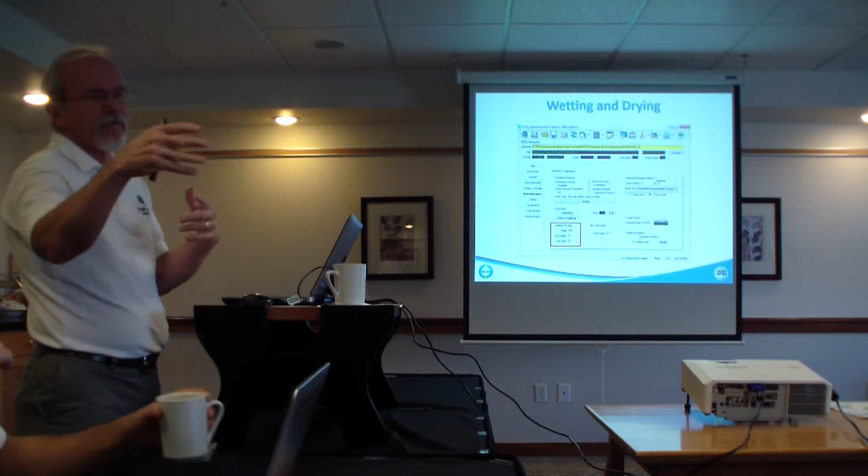First off, just kind of some big picture, some things that are needed for a lot of different models, but kind of where do you get it? So you control wetting and drying, as many of you know, here with this flag. We're going to basically simplify this. We need to be simplifying it for a while. There's no need to have a minus 99 and a bunch of other options here, because it basically all boils down to turn wetting and drying on, turn wetting and drying off, other than the dry depth number, which I do think still needs to be there. That's it. But right now there are several options that are available. When you put your mouse over it, it gives you a description of what some of these options are.

Now, it also depends upon if you're 2-time level or 3-time level. 3-time level, you only have one option that really works. If it's any value other than 0 there, the 3-time level solution will apply the same wetting and drying algorithm. Now, the negative in the wetting and drying term has, in traditional and legacy applications, dealt with what they call the cell skip, where it computationally eliminated cells that met the cell dry criteria. But if you didn't have a negative, it didn't skip. Well, with EE8, that's no longer true. Basically, EE8 has thrown out that general approach and has taken a more robust, complete view of wetting and drying. If a cell is computationally dry, it's always skipped, no matter what, in all the routines.

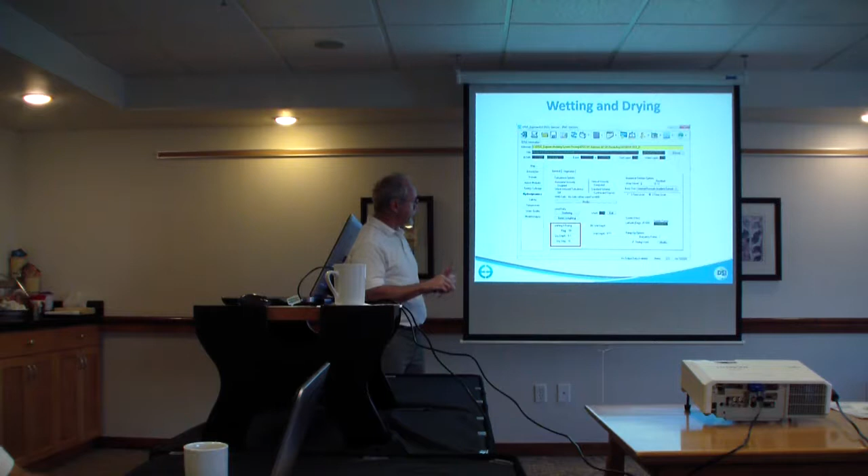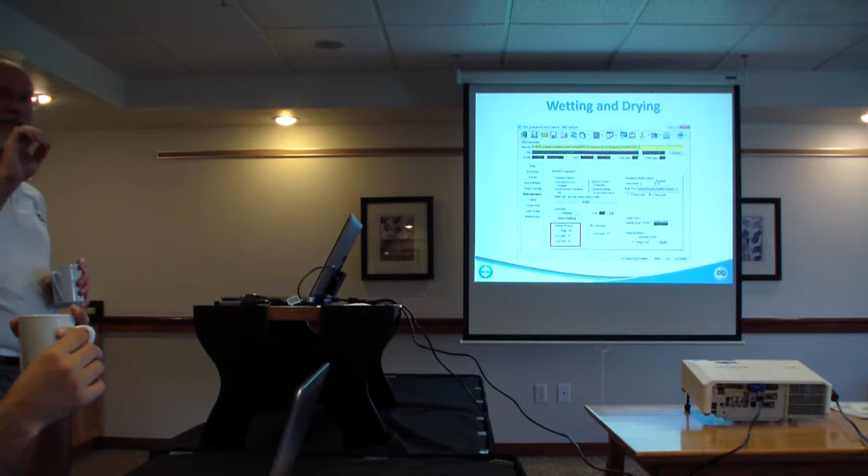I make the assumption at the end of this step, if it's still isolated, that all the water in that cell has disappeared, either through evaporation or infiltration or something. So really that's the question. So, wet and dry, yes or no? If you turn it on, what's the dry depth? And then finally, do you want to waste water from isolated cells? And that's really the extent. Yeah, Mike. Now, if you have a very large area that is isolated, but you don't want the water to be... Right, but it has to be a single cell. All four faces of that particular cell have to be isolated. If you've got just two cells connected, they'll never go dry because it won't apply.

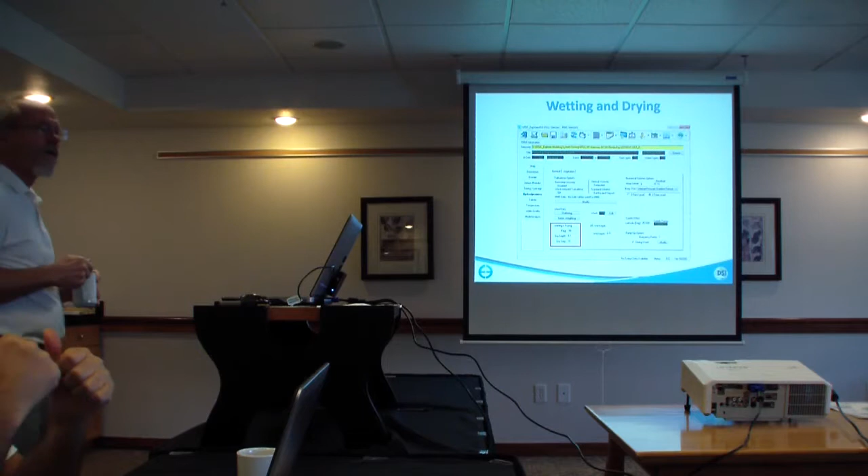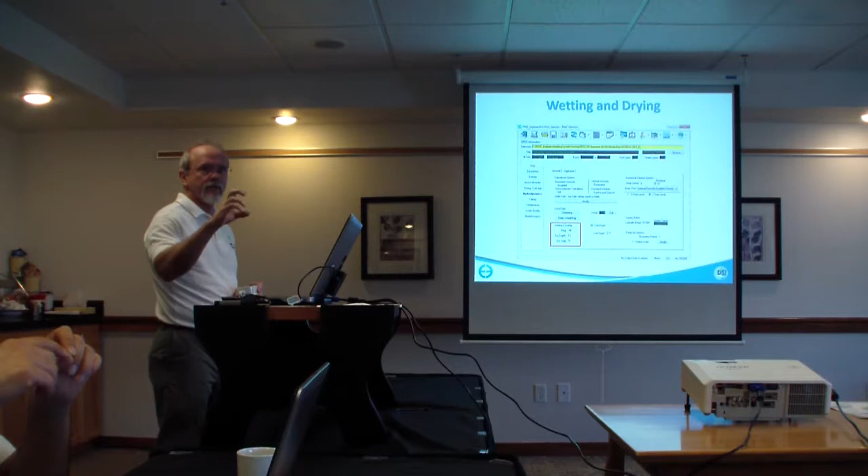Could you go over the idea of wasting? Wasting's just going to get rid of all the mass that's in the cell. Well, the water essentially disappears. It's actually, from a mass balance perspective, it goes into a QD waste bin. So later, if you're trying to do mass balance, now EE doesn't store that. That's all internal to EFDC.

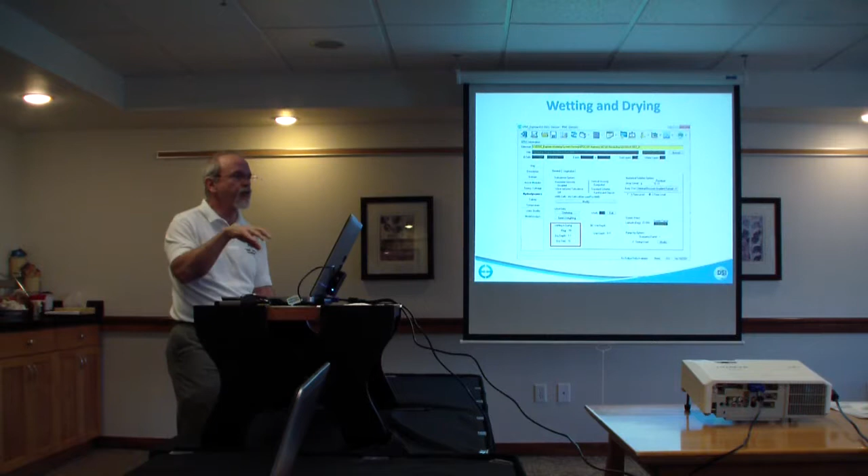So we were talking about this a little bit, about conducting mass balances in EFDC versus in EE. Well, EE is limited in its mass balance feature. It does some crude, kind of high-level mass balance, but because of all the processes and the time step at which those processes are occurring, really, if you need to do mass balance, you need to do it inside of EFDC. We haven't really covered that, but it's probably worth mentioning.

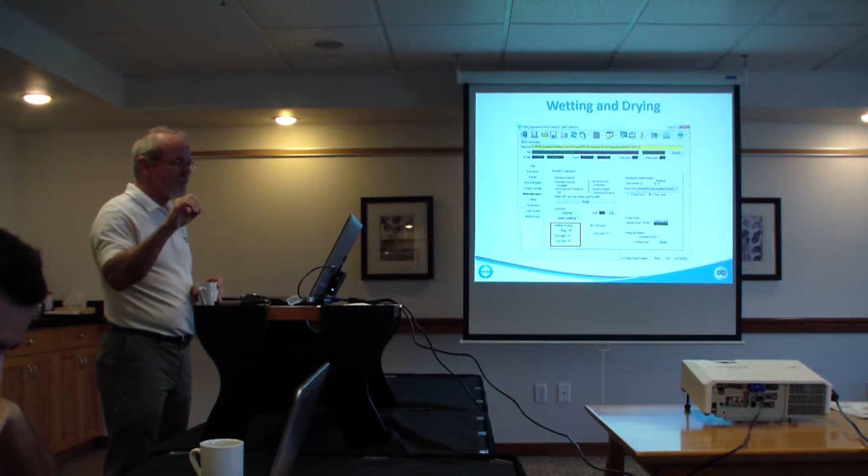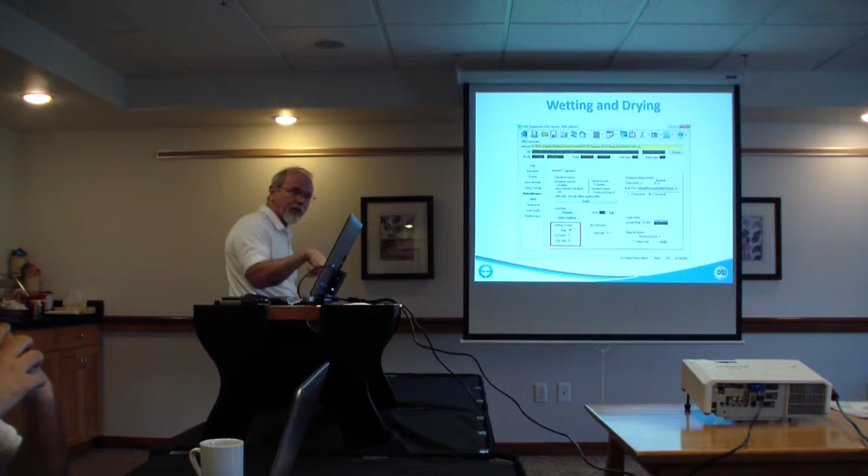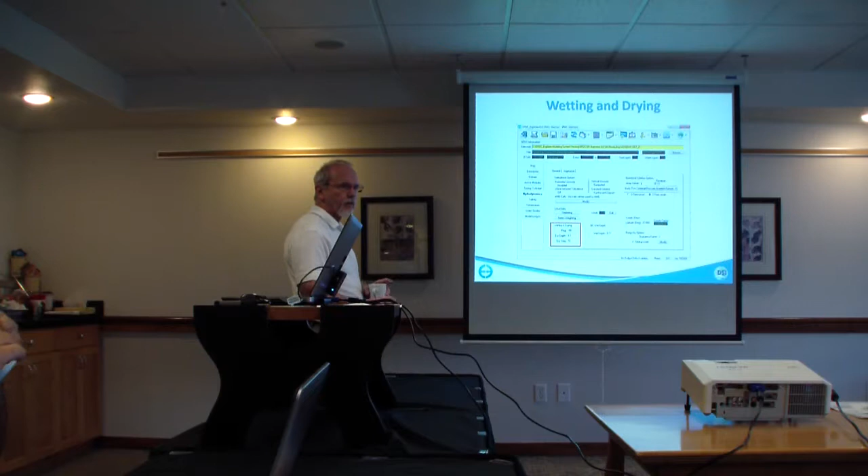Getting back to what happens to that mass, that water just disappears. Any concentrations that were in that water, gone. Now, if it's solids, and the solids have settled to the bottom, they're in the sediment bed, not in the water column, they're maintained. Nothing happens to that mass. But anything in the water column that is quote-unquote wasted, the water volume is wasted and the constituents in there are wasted. Wasted in the sense that they disappear.

And that's when that dry step has a negative value. The reason why it doesn't really make any sense, it doesn't really apply anymore, is because the idea was that after this number of time steps, it would treat it as dry. But we don't ever do that anymore. So it's always, well, no, it's not always wasted. It has to be negative right now for it to be wasted, but essentially it ignores it right now in EE8. So there's some legacy stuff that has to be cleaned up to move forward into a more streamlined, robust approach.

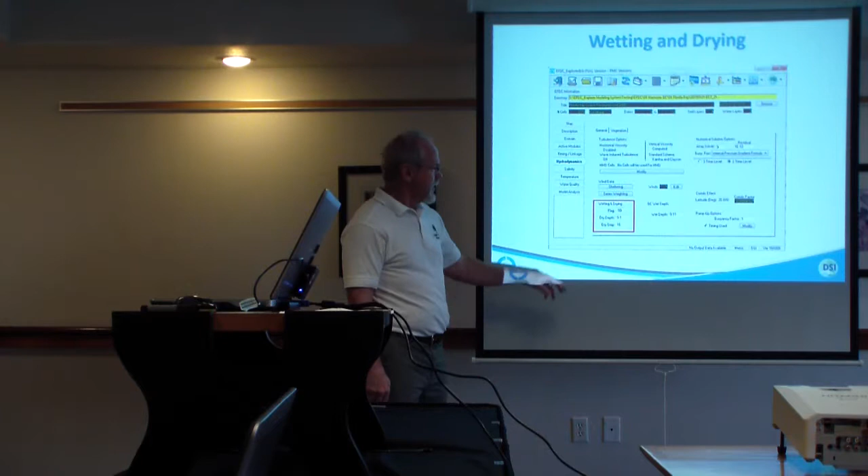What happens, let's say in this case, after 16 steps? After 16 steps, actually, all it does is reset the counter and start counting again. That's all it really does. So in this case, for EE8, it's going to do absolutely nothing. But if it's a negative, then it does get used.

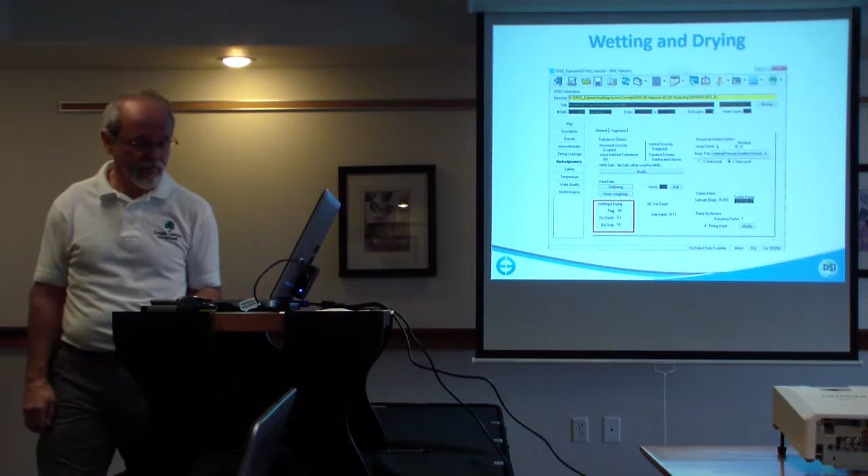Coriolis had some complaints from various people about the way EFDC computes Coriolis. There's not a Coriolis factor in the X and a Coriolis factor in the Y. There's a single Coriolis factor that's applied equally to both X and Y. And the only thing that affects its overall rotational effect is model grid size and size of the domain. And shoreline, bathymetry, all those things affect it. But this is a single parameter, basically calculated from your latitude. Is that the middle of the...? Yeah, middle of the model domain. It's a simplistic approach, but that's how it's computed.

And in EE, by default, it's using the latitude at the model domain centroid, but you can provide your own value. Just type it in there, and it'll calculate what the Coriolis factor is, and that's what goes into the input files.

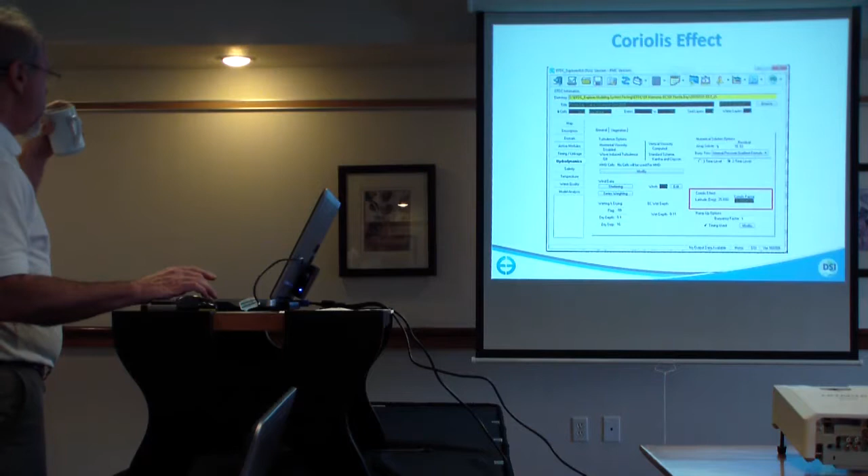Well, I didn't really talk about this, but it's probably worth a brief mention. Ramp-up options, because coastal systems can be notoriously unstable when you're starting up the model, if you've got these open boundaries and they're deep and different things. The standard option for a full model run with no special conditions would be timing is not used and the buoyancy factor is 1. Essentially, this buoyancy factor is kind of a legacy testing tool left over.

I can have salinity turned on, temperature turned on, and set my buoyancy factor to 0, and density will have no effect on the model. I can optionally put in a buoyancy factor of 0.5, and density only has half of the effect it would normally have. But it doesn't really make any sense. It's a testing tool, and I use it when doing diagnostic work. I'll set the buoyancy factor to 0 just to look at impacts without density. But it should be 1 pretty much all the time. You've got to have a strong reason for it not to be 1.

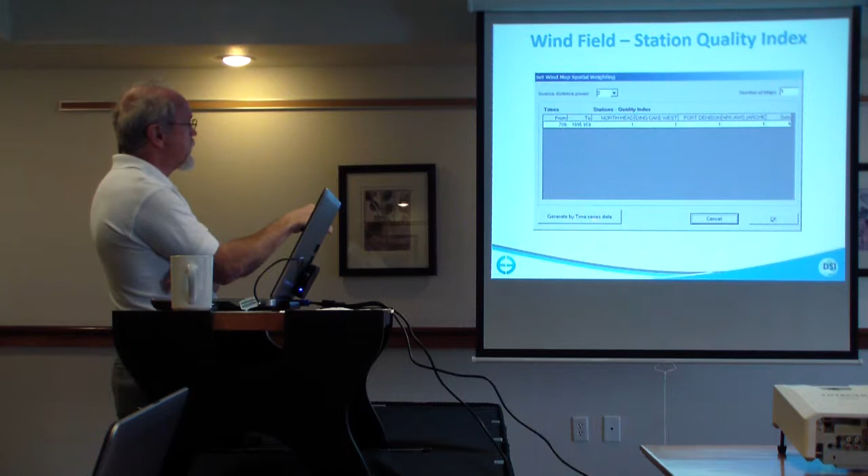They all have data that cover the model runtime. So there's one map shown here. However, if for whatever reason North Head only had data for half of my data collection period, but I wanted to keep it in because I felt like it added value to the modeling process, if I click this button here, Generate by Time Series, it'll go out and look at your period of record that you have for each of these different stations, and build a set of maps based on where data is actually available and where it's not.

And if, let's say, the first half of the simulation period North Head was available, but the second half it wasn't, this would show up as going from like 700 to let's say 900, and these would all be 1, 1, 1, 1. These are a quality index. I can put more weighting on one station than I do on another if I want. This doesn't have to be 1. This could be 0.5 and 2 and 4 and then 1 again. Doesn't matter. It's just a relative weighting of each station.

But then the second line would be 900 to essentially 1100. This quality index would be 0. So essentially, there's no data, so you can't really use it. So the quality index would be 0. And then we'd have 1, 1, 1. So from day 900 and on, you'd have a different weighting across the entire model domain based on this available data and the quality index.

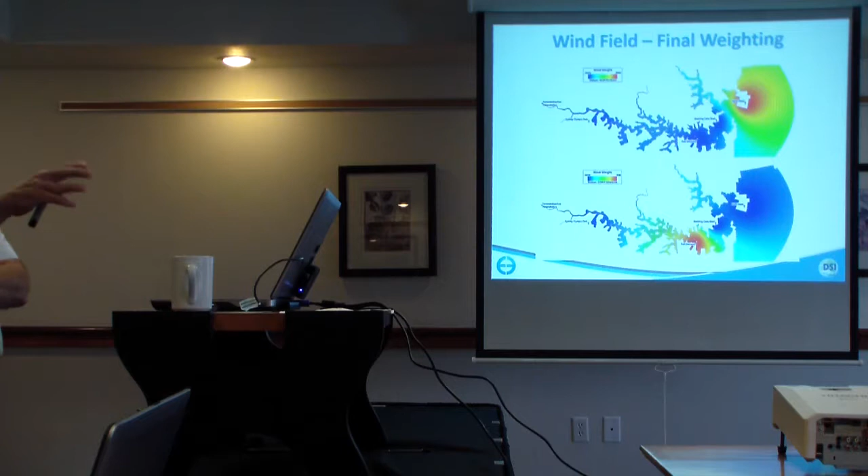Some of you guys have seen it. I forgot who was all here. Only Mike was here. We should stop and just show him.

Yeah, it's using the 3D fly-through tool in EE. We have a fly-through of Sydney Harbor. But anyway, so you can see the weighting. And we're using an inverse distance weighting of 2. You can make it 1, 1.5, 3, whatever you want. Actually, I don't know if it's a drop down. It's basically in half unit increments, but still, that's more than adequate for picking what you typically want.

But you can see the effect. So Fort Denison is here, and all the cells around here essentially have a weighting of nearly 1. It's really hard to read up there. Maximum of 0.998. Yeah, it should be close to 1 right near the monitoring station, and you can see the influence. So Fort Denison has an influence up here in this arm, but down here it's around 20% or so. North Head's about 20%. If I looked at Fort Denison, it'd be about 15%. By the time you get that distance out, all the stations are having an influence on it.

So that's kind of the effect of these winds on the wind weight, and that's ultimately what gets used. And exactly the same process works with the ASER files. So if you have ASER weight, it's the same process that you would go through and apply these relative fractions. So any number of stations, and any mix of data, it's a pretty robust way of calculating all this stuff.

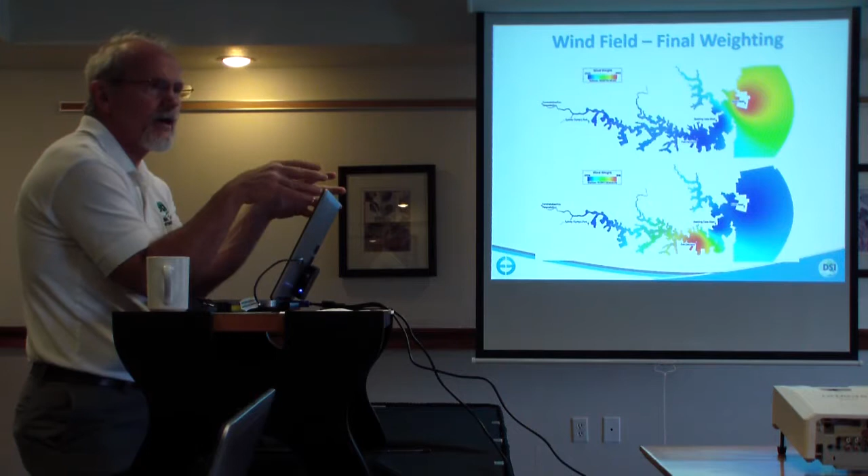No, my personal feeling about wind is that if you can get wind data to the model on a 15-minute or less basis, you're better off than hourly winds. It also depends upon how your data is collected. If it's an NCDC or National Weather Service collected data set with all the modern telemetry, it's an average value for the hour, and that's okay. But I prefer driving it with shorter term data and letting the model respond to those shorter term perturbations.

But yeah, it's frequently just all over the place. Not random, but nearly random. And certainly at low wind, it is random — it's just eddies floating around in the atmosphere.

Yeah, you could smooth it, but I wouldn't necessarily. Just make sure, unless it's instantaneous — if you've got some site-specific data collection and it's an instantaneous wind, unless it's pretty frequent, it's almost useless. It has to be averaged, some high frequency data collected and then averaged into some reasonable time step.

So if you're on 6 minutes, would that be a 6 minute average or 6 minute instantaneous? 6 minute average.

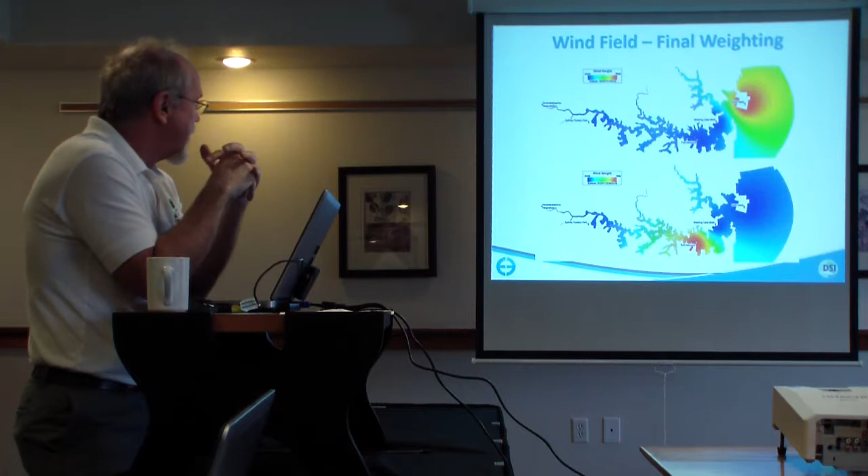That puts a lot of data in, but computationally it doesn't make any impact on the runtime. Files are bigger, but it's a pretty minor issue.

Okay. Let me think here.

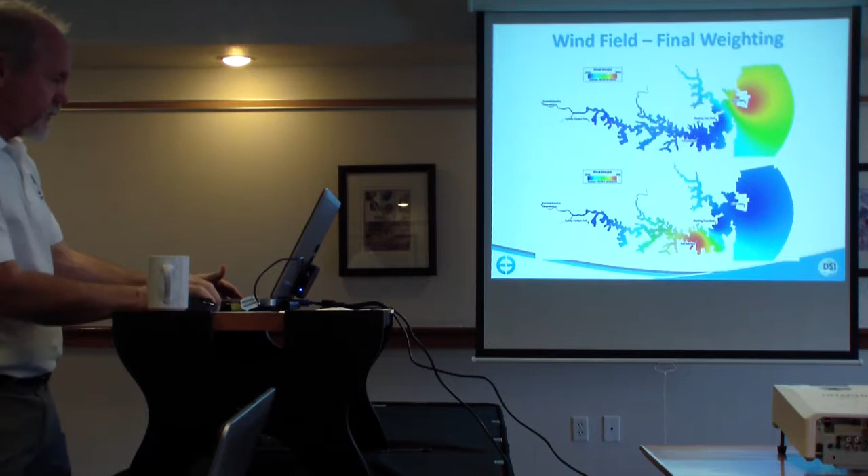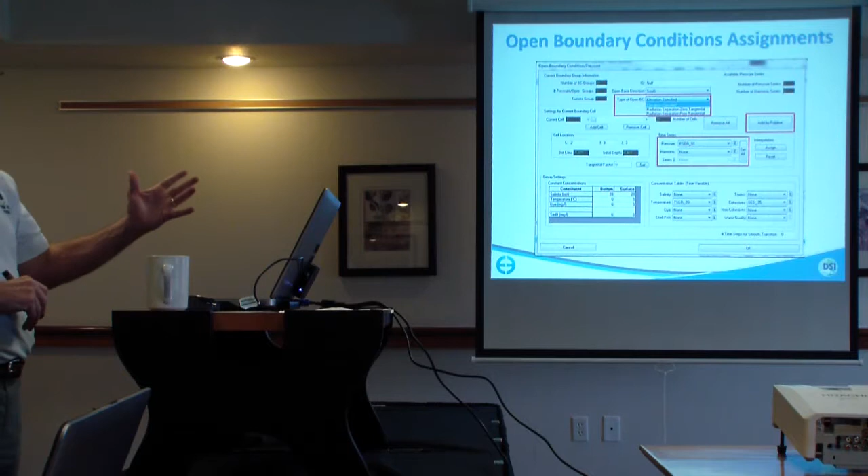In EFDC, if you look at the actual input file, you can do it on a cell-by-cell basis. But to me, that makes no physical sense. How many people have concentration data on every separate cell along an open ocean boundary? You're lucky to have some data offshore, let alone every cell. So we think this makes more sense, it makes it a lot easier to manage, so we just group all these parameters down here for the entire group.

So here is the specified constant concentrations, and you'll notice here we've got some combinations. We have salinity and bottom elevation. At the bottom of the model, it's 33, at the surface it's 28, and EFDC will linearly interpolate between those. In this particular case, I have no salinity time series, but when it's calculating an incoming concentration of salinity, it'll take the appropriate depth concentration of salinity from these numbers, plus whatever would have been in the salinity time series.

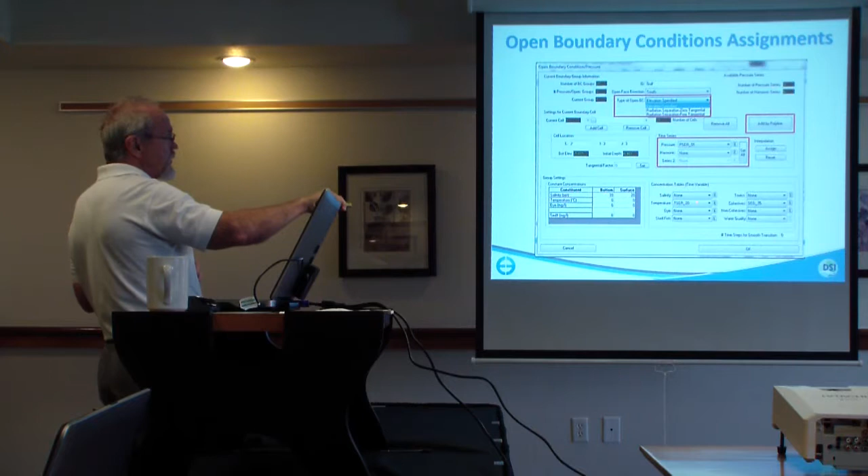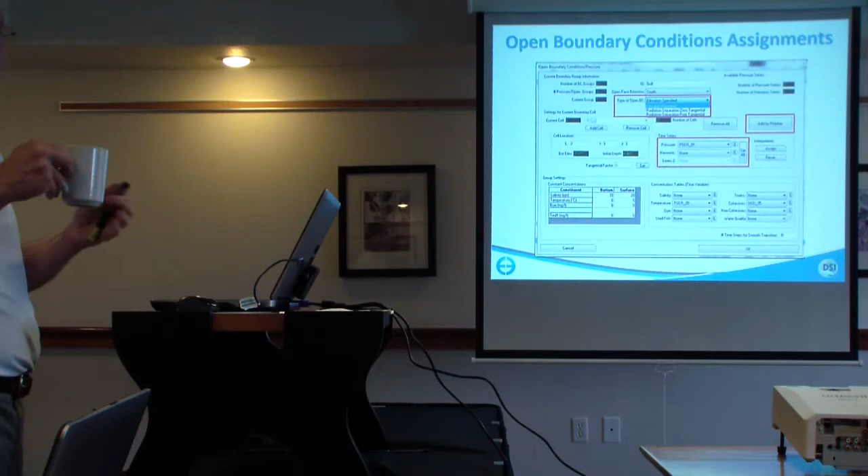Conversely, temperature, we're using a zero here, but we're specifying a time series. So these are either or, but they can be both, you could actually use both. Can you specify a layer? Yeah, oh yeah. Well, you can't with the constant, but the time series associated with the concentrations are all by layer, because you specify for each layer. So you have to specify them by layer. Now they could be uniform if you want, but you have to have a value for every layer.

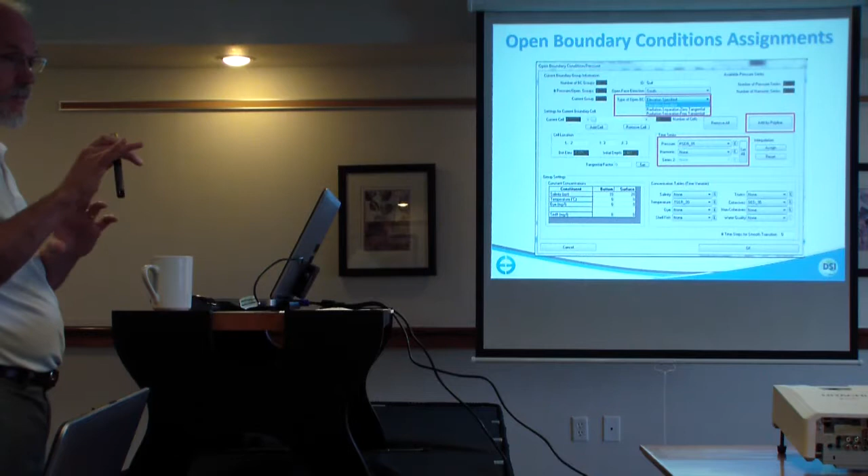Number of time steps for smooth transition - it's useful for that not to be zero. This just kind of deals with the concentration transition from inflow to outflow, to kind of prevent a little bit of instability at the boundary. But if you don't really have instability at the boundary, it's not going to do anything. It's just saying how many time steps it's going to enforce before it allows the concentration profiles to turn around. I typically put a number like 20 in there, just in case there's some little bit of oscillation near the boundary.

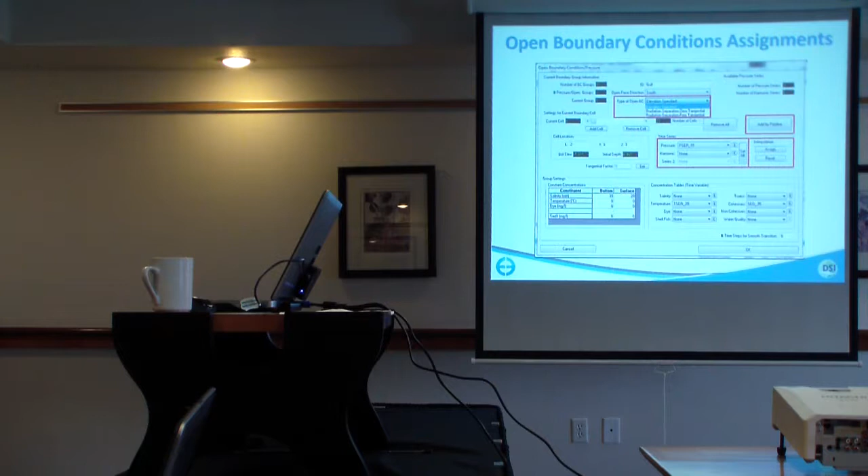Now, because each cell can have a unique series - and this is what I want to play with here, I don't know if we'll get to it before lunch - you can, if you had a unique harmonic signal for each cell, put that in there so a particular cell would have a particular harmonic, or you had a measured series extracted from some large-scale ocean model, and you're extracting time series for your pressure. You can do these all manually and have a separate series associated with each and every cell. However, a lot of times that's a luxury you don't have.

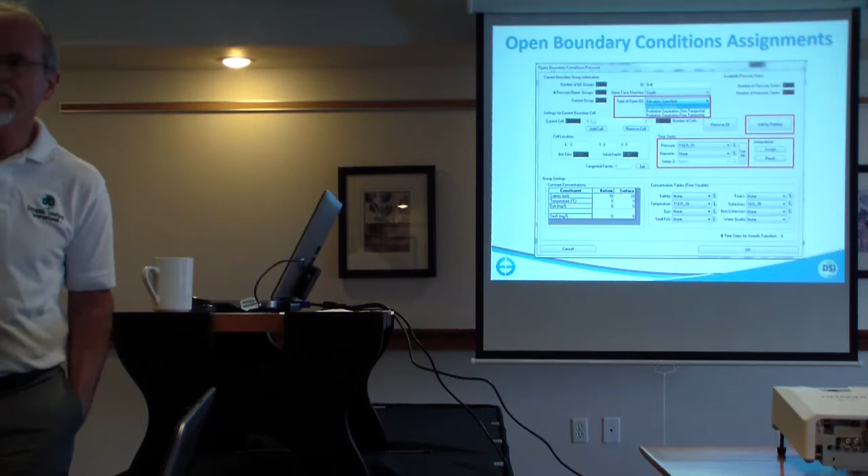So what you do have is a known series at one end of my model domain, and another known series at the other end of my model domain. And now I want to build essentially an interpolated series between known time series at either end of my domain. EE has the ability to build those time series up for you - it interpolates both spatially and temporally to build these time series. You can reset them and do it again easily, if you change one end or the other of your series, or you're doing sensitivity and moving one, you have to reset it and then reapply the interpolation process. We'll play around with that here today.

Let's talk about the constant concentrations.

So let's reiterate some of the user interface side. This is where you make your major selection with respect to setting the radiation type or specified elevation type.

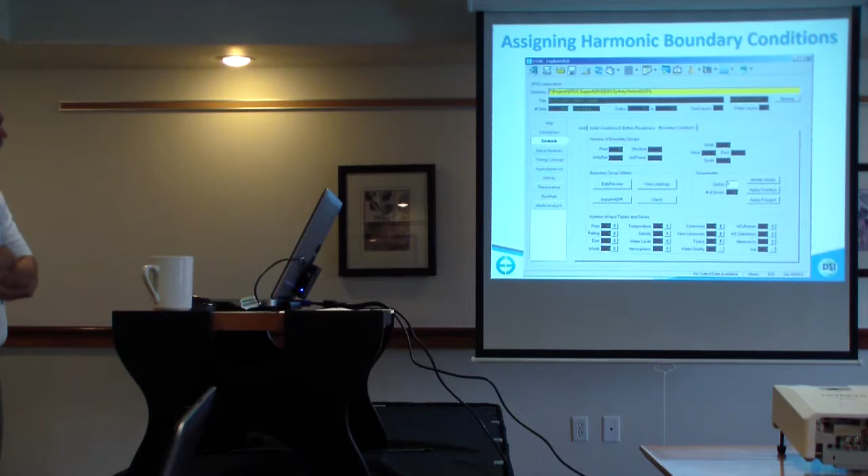Now let's talk about assigning some of these time series. Let's start with the Harmonic Series. In EFDC there's an option for specifying harmonic coefficients, and for each station you define amplitude and phase, and it will internally compute the boundary forcing at that cell. That's referred to as the harmonic boundary condition, and you can access that directly from the domain tab boundary conditions.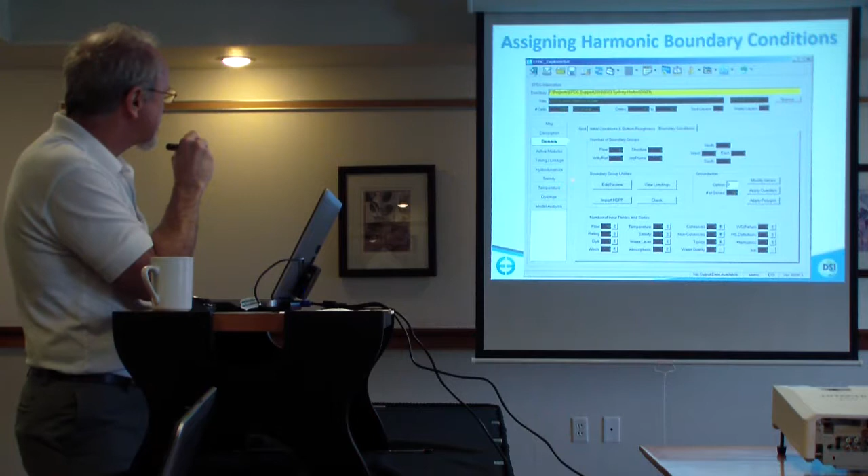All your time series and forcings for your various boundary conditions are available down here in this frame. Or you can access them under hydrodynamics, which has a wind tab where I can edit my wind, or I can just go to this tab and click down here. Likewise for temperature, I have a time series access here, but I can also access it there. It's just a quick way to get access to all the information.

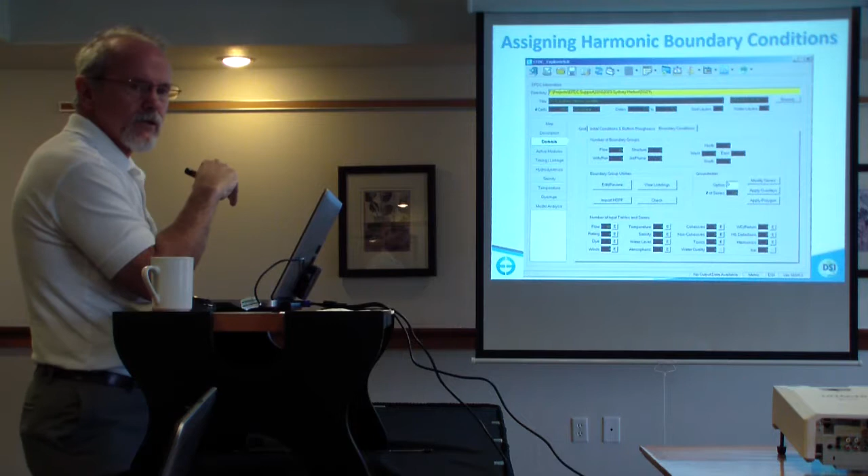So the Harmonics tab is available when you're editing an open boundary condition, but here we can go directly to it. When you click on that button, it brings up a form that uses the EFDC computed harmonics approach.

This is the equation EFDC is solving when it's calculating your resulting tide level. It represents the number of constituents you're actually simulating. In this case, I'm only simulating 5 of the principal components of that tide series, picking up some of the most significant amplitude constituents.

I've got 5 constituents shown, so N would be 5. So it's calculating, and H is the amplitude, this is the speed of the tide harmonic, and this is the phase.

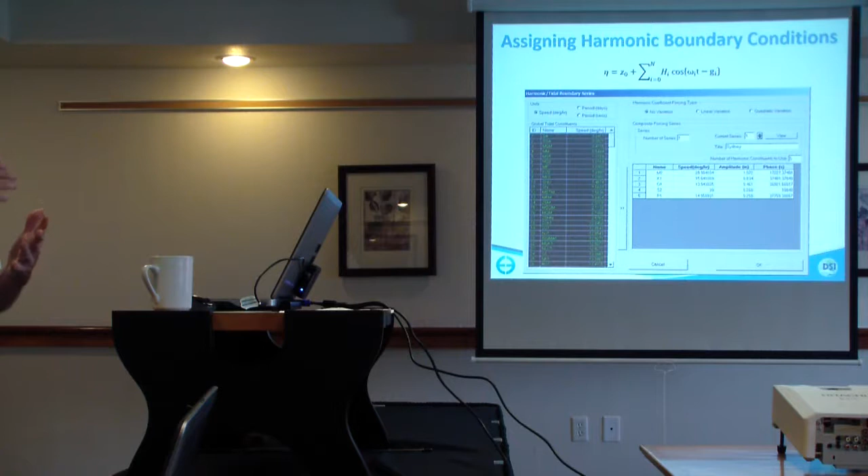Now, oddly, and I'm not sure why it was done this way originally, all the tidal constituent parameters are defined in seconds, which is a bit of an odd way to refer to these constituents. Because if you remember looking at the NOAA website, everything was in degrees per hour or degrees, and that's true just about any place in the world where you look up these tidal constituents - their units will be in degrees or radians, or radians per unit time for the period or the speed.

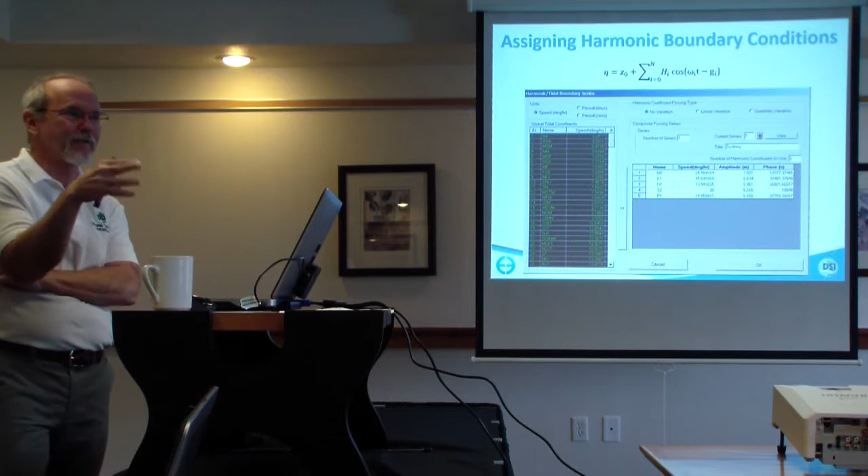So you have to convert - and EFDC even should do this, but it doesn't. You have to convert the corresponding phase that you look up on the NOAA site over to seconds. It's an easy conversion, we have it on our website, we tell you what to do. Basically, you take the phase and divide it by the speed and convert it to seconds. But you have to manually do that from the website. This probably should change and have degrees here, allowing the user to directly input it, but that's a different issue. Anyway, this works.

But importantly, remember that the G essentially adjusts your phase based on your time zone. So it knows your station position, and your phase will vary based on what time zone you selected when you asked for your harmonic coefficients. This is a simplified equation approach for your tidal harmonics, and it works - that's what's in EFDC.

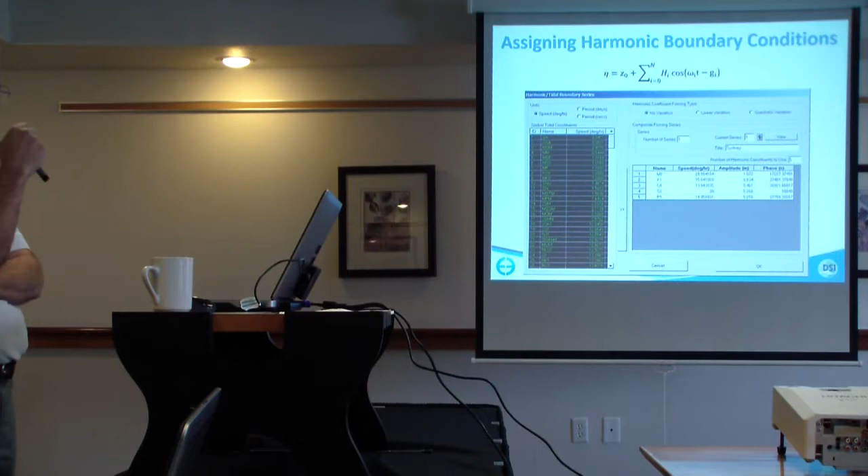But if you try to go through a really robust process of duplicating a predicted tide series from NOAA or some other system, you're not going to match up exactly. It's going to be off because it's missing some terms. We've got these terms in another tool, but we'll talk about that in a minute.

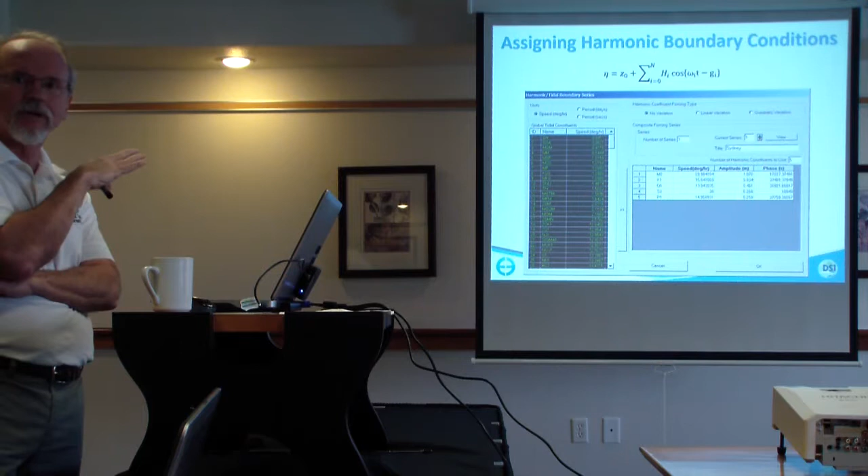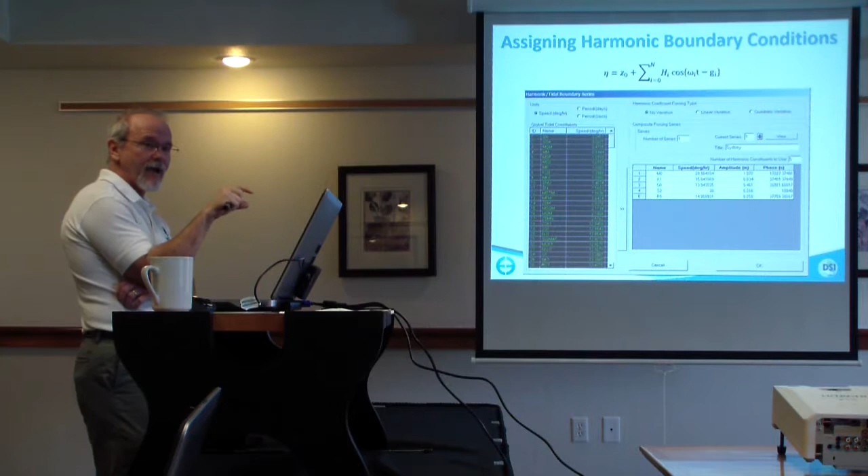Let's talk about this form here for a second. As I was mentioning, there are some other forcing types using harmonics where you can vary temporally and between the harmonics. I have the equations and I see them in the code, I know what it's doing, but I haven't ever seen the theory or a description as to exactly why these are there. If anybody has any documentation on this, I'd love to get it.

But typically we select no variation, and these are then directly whatever's computed by this equation from these coefficients, summed up to a resulting tide level. Now you'll also notice on this form here that there's no Z0.

That's an offset, because the harmonics are going to basically produce a water level based on essentially mean sea level, because it's an averaging of all those processes. So if you need to shift the results from a harmonic analysis to a different datum, you can do that with the time series, because remember, they're added together.

So if I just jump back up here, my harmonic series could be a robust set of harmonics that essentially produce a time series in mean sea level. And then I could just apply a quote-unquote time series, which is really just a flat line of my offset. So I can just shift the harmonics up or down and base everything into my proper datum. So it takes a couple of steps, but it works fine.

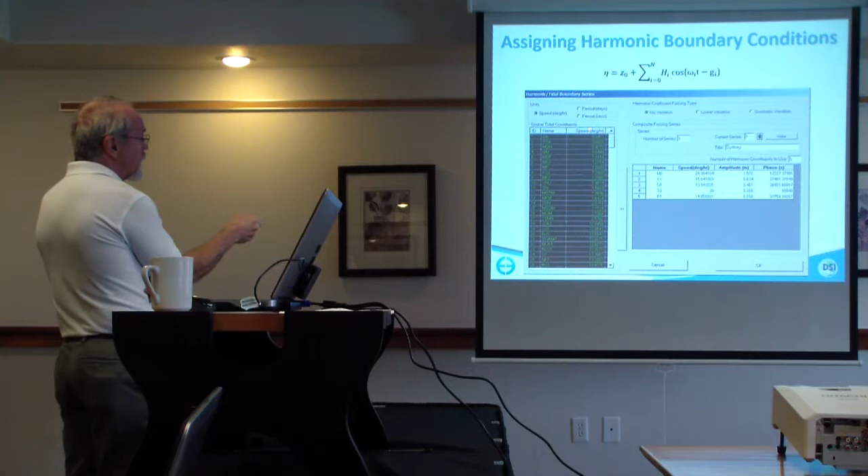We have these common names and a common speed, and you can display them in different units here by clicking on these different buttons. You can also click and sort. If you click on the column header, you can sort by speed or sort by name. It just makes it easier to find. So you find your constituent that you want, select it, click this button here, and it adds it to this list. And then you have to finish populating it with a phase and amplitude. But it at least gets you that first step to get your speed nailed down.

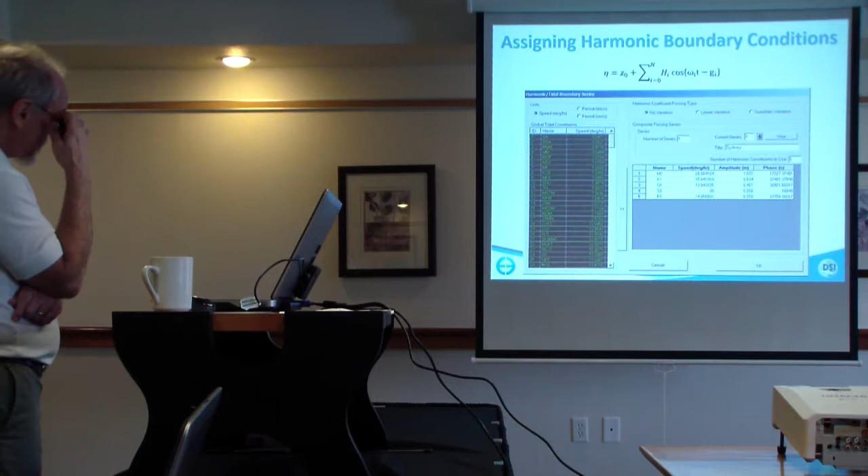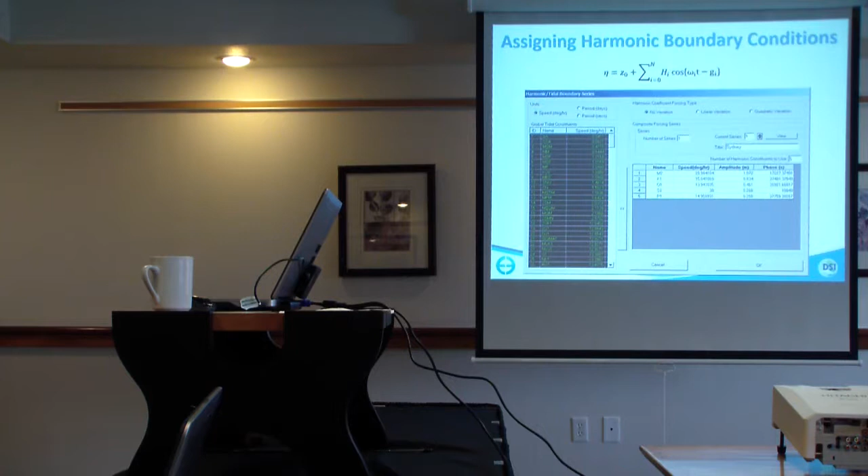And it's easy to find, but as I was mentioning before, because some of these smaller, lesser known, lesser used tidal constituents are not uniform in their naming, it's best to focus more on the speed, especially for those smaller or less used constituents. So I can sort, as I said, by speed or by name.

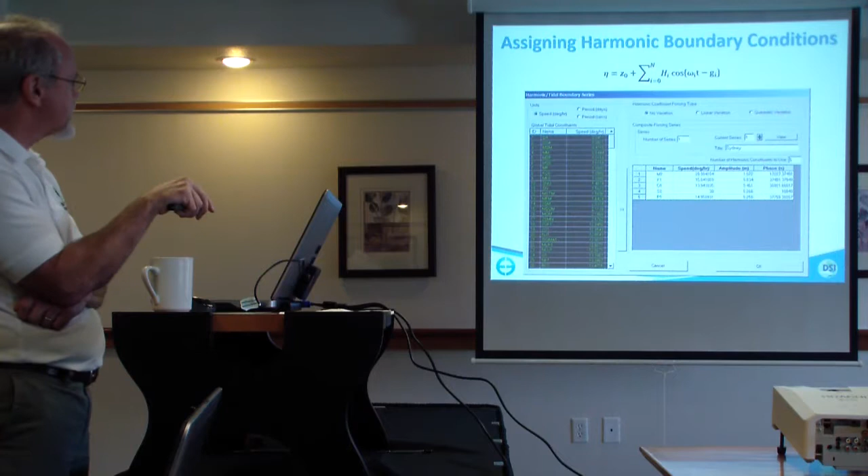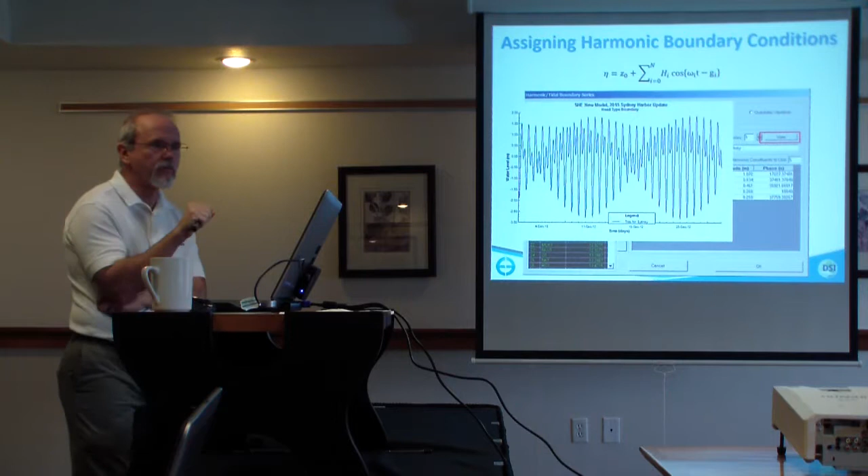Add them, and then when I get it built, I can test it without having to save it to the model. I can just hit the view button and get a display of what that tide signal looks like. Now in this particular case, when you hit the view button here, the Z0, there's no time series component added to it. So this is just straight up raw data, so you'll notice that essentially it adds up to a zero mean sea level. So this is a nice little tool. That way you can test to see if you're catching the patterns that you think you should have from harmonics that you built.

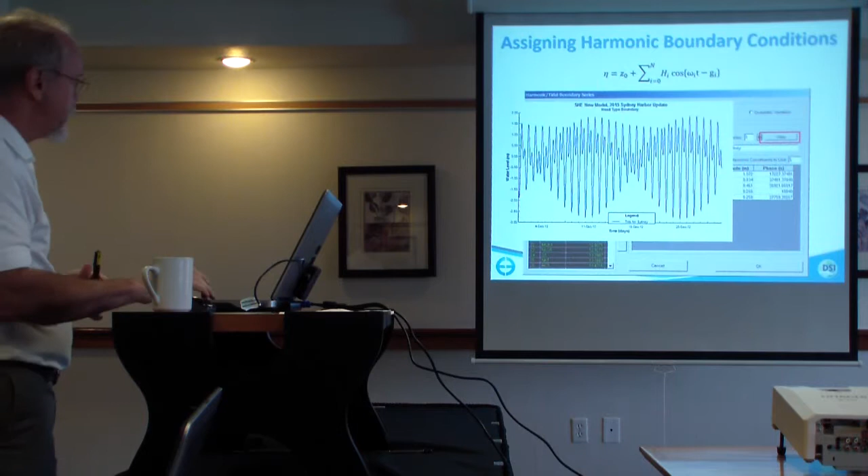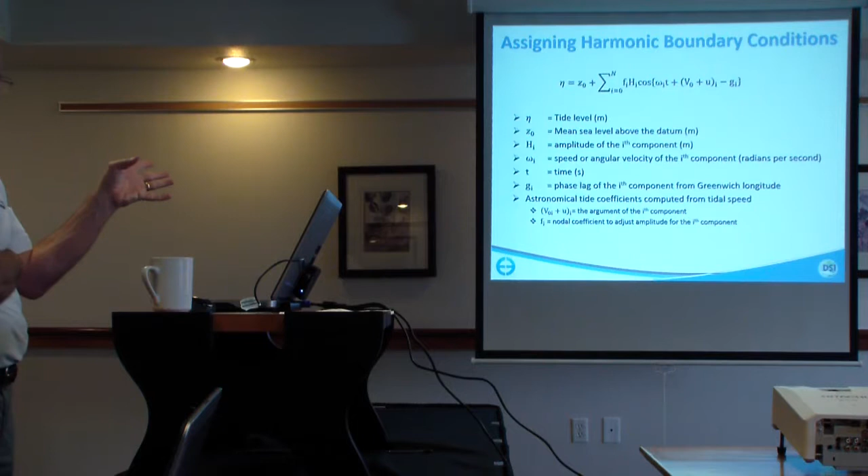However, as I was mentioning, it's missing some of the coefficients. This term here is missing, and this term here is missing from the equation. And these are computed internally to EFDC Explorer through a different tool. So there's two approaches for dealing with harmonics in EE. One is you use the EFDC supplied harmonic approach and you just give it coefficients and any offsets through the time series. The second approach, what we're talking about now, is that we use harmonics, but we build an actual PSER file with computed tide values based on harmonics. And that's this tool here.

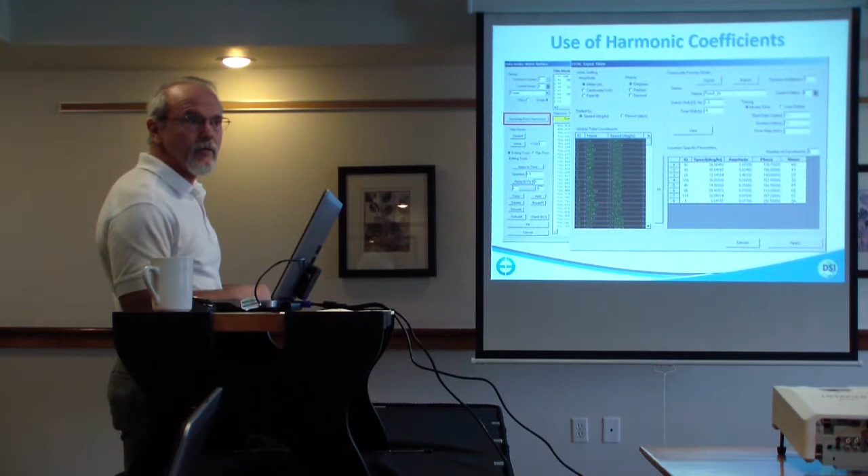So you go to the water surface time series form, and then you hit the generate from harmonics button. And when you do that, it pops up this form here. It's similar, but not completely the same, and I'm working on a few tweaks that I want to make to this. But again, you have your list of the, I think we have 244 tidal constituents configured. I think that's the number that we have.

And then what you do over here is you're specifying the units that you're going to use down here. This isn't the units that EFDC ultimately uses. This is just user input units. You're going to compute the time series here, so EE handles all the units. It just wants to know what the units are. So if my amplitude is in meters, I enter meters here. If it's in centimeters, I use centimeters there, etc.

Phase. Nice thing here is I can actually input phase directly in degrees. Like I said, I don't know why we didn't do it on the other form, but we didn't. We should. And we'll fix that.

But anyway, so you put your phase here, and importantly, you also give it the constituent name here, because it's going to use the constituent. It has a lookup inside EE. It looks up what the constituent phase is and knows how to populate your astronomical parameters for the tide calculations for your harmonics. So again, it's the same basic information: speed, amplitude, phase, the constituent.

And then once you have that basically configured, you can view it just like we did before. But over here, because you're actually building a PSER file time series for this, it needs to have some basic information. If you just click on that or leave it to the default model time or run time, it basically starts at the beginning of your simulation, and the series will end at the end of the simulation.

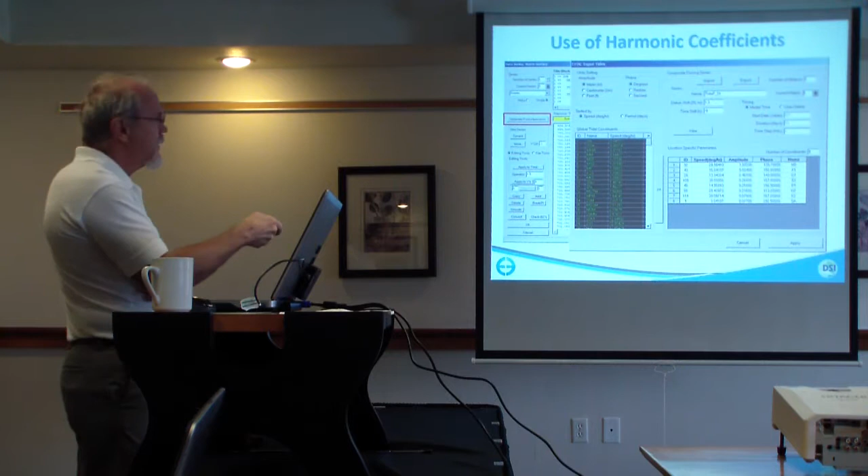So the model time that you have specified there, it doesn't read that from? No, it does. It does. It reads it from the timing settings. Okay. It's just saying that's what it's going to use here, and that actually is the default that comes up here. But then you can manually change it. But that's exactly what it is, using that tBegin variable and the number of reference periods.

Now, also a useful feature is that you have your datum shift, your Z0, right here. So I can shift my harmonic series directly to the datum that I need. And you have offsets where you can shift your time if it needs to be shifted for whatever reason. One of the reasons is that there's no good daylight savings time component. So you can get your harmonic coefficients in local time, but switching around between local and daylight always causes problems for a lot of different reasons. But anyway, so you can do a time shift here, adjust your timing.

Anyways, you get it all set up. You can view it. This is an example where we built the tide series for the Seattle station for about a 30-day period, I guess, and we're comparing the predicted time series from our tool to the actual measured tide at the Seattle station. And basically we're tracking as good as the NOAA predicted tides did at the station. So that's the tool.

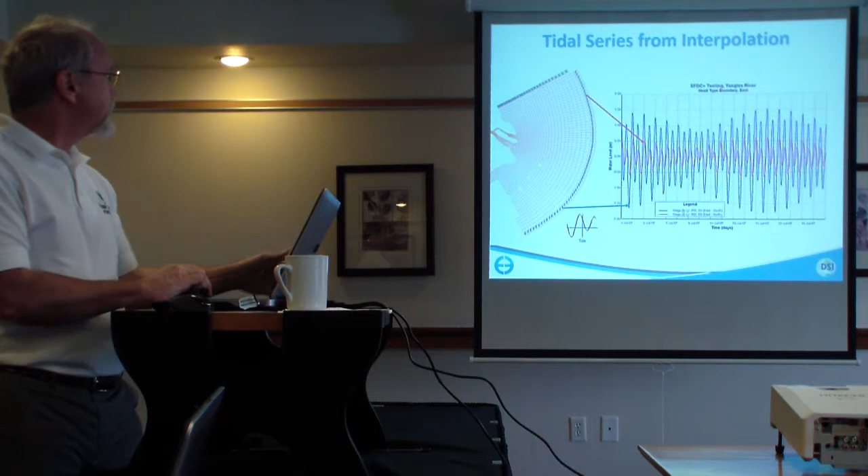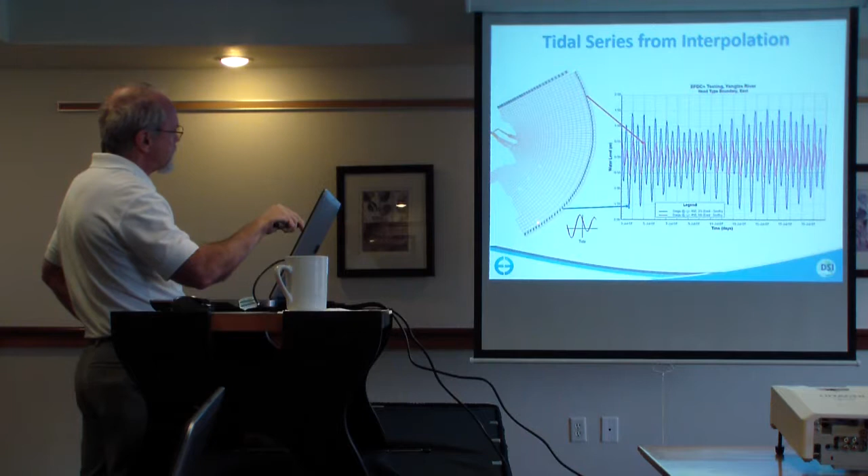And this is the result, and then we'll be done, ready for lunch. I just grabbed a series from this cell, which is the red line. Grabbed a series from this cell here, which is the blue line, and of course it was a different series up there and there. But anyways, every cell along this face has got its own unique pressure series applied for the boundary condition. That is tide interpolation.

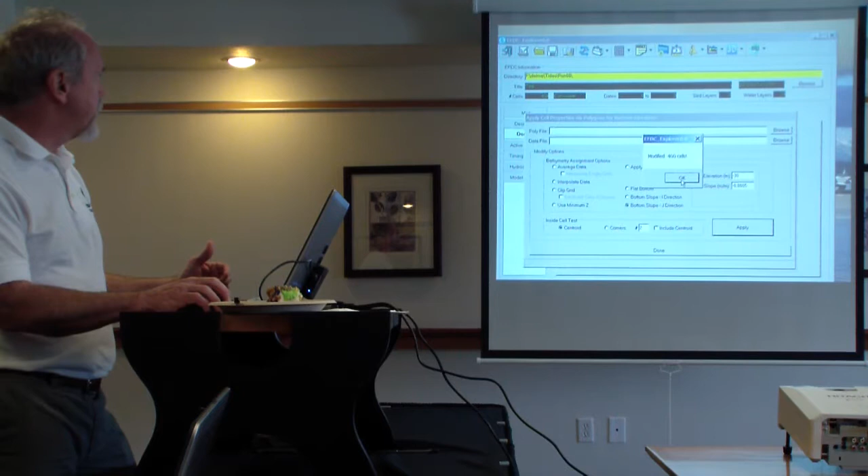I don't know what that's going to do. I could probably calculate it out real quick, but we'll just play around with it for a few iterations. That's it. It tells me how many cells it just applied to. Now let's look at that bathymetry and see what we just created. So that 0.0005 is a little bit much if I want to use 0 as the mean sea level. But you can see we're sloping from a bottom elevation of minus 30 meters below the mean sea level or our datum up to 15 meters above our datum.

Well, I don't want to go that high, so let's just iterate again. We could drop the bottom, but we'll just change the slope. So that was minus 30, and the slope is minus 0.0001, 5 times, so a good bit flatter. Done. Look at the bathymetry. Oh, I clicked the wrong button. Whoops. I left it at the J, so now I'm sloping in the I.

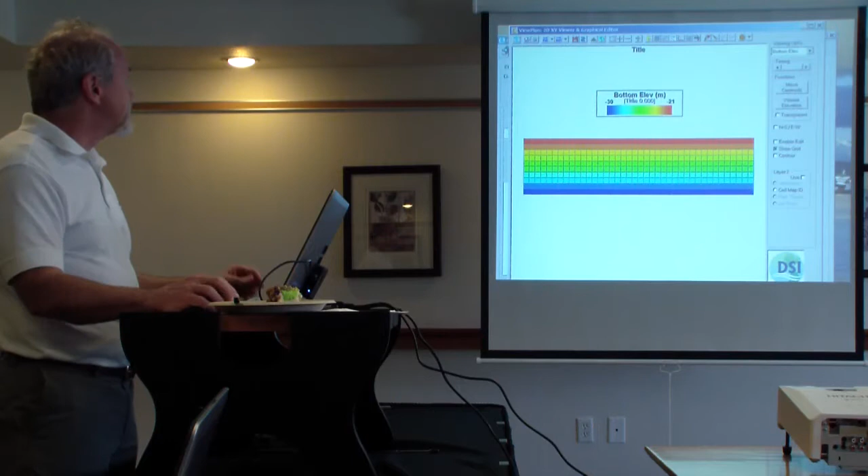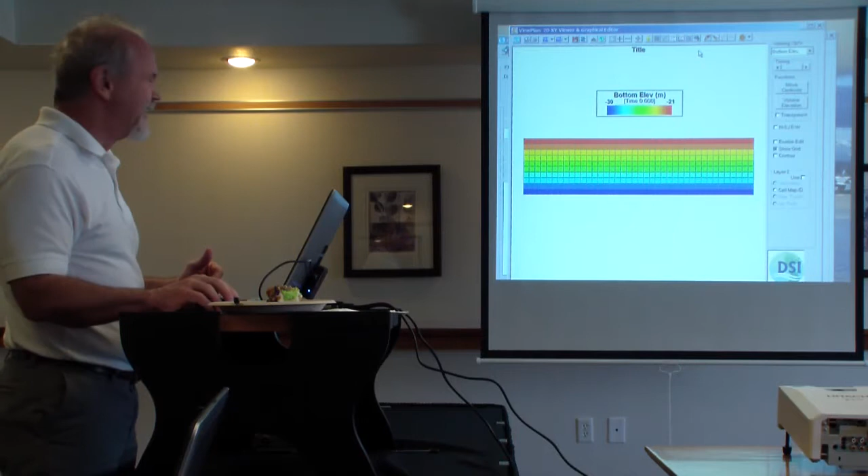So we're going from minus 30 up to minus 21, so it's sloping up to the cliffs of Dover, I don't know, or something. Still deep at the coastline. All right, so let's go ahead and save that.

Now, were you able to find it? Create 4 files, 4 time series. Oh, okay. These are in Dropbox? Oh, I see them, yeah. Thank you. You're welcome. This one is just the extension problem. You can delete that. Stick them up in the distribution. Oh, that is already in your distribution. Okay. Well, copy it into my project folder so I can find them easier. But anyways, everybody, go ahead and grab this. Should be on the Dropbox folder that you've got. It'll be under Projects, Coastal Yangtze, Open Boundaries.

Would you let me know the ID and password in Dropbox? Oh, there is no ID and password. I gave you a USB drive this morning, right? Can you open that? You don't need a username and password. Go back to Edmond's training. Click here on the Dropbox file. Copy that. Okay, thank you. And paste it. Okay.

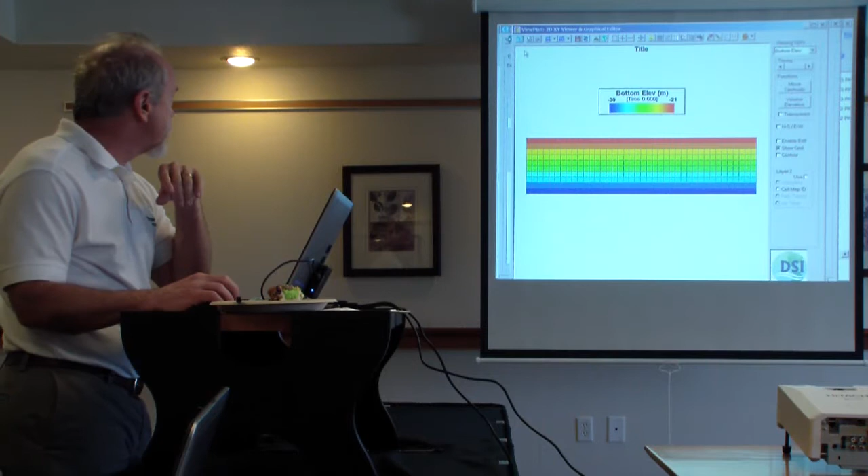We'll go back to the minimum height that we specify here. Is it just for the initial conditions? Yeah, the minimum height term that's in the initial water surface. Let's go back. This is one of those legacy terms. Whenever you see this legacy term here, it's stuff left over from old implementations of EFDC. We keep them in here because some people use them, some people don't, because that's what they're used to. But I try to keep people away from making any changes to these at all. But this minimum height gets applied at the start of the run.

It looks at all the cell depths for the entire domain, and if there's a cell depth less than the specified minimum height, it gets that value. That could be a problem if people aren't paying attention and that height, for whatever reason, is higher than your dry depth. It's going to put basically a water layer over every cell, even when they're up on the top of the hill. And then the model turns on, and you get instability and it crashes. All that water that's mounted up on these hills just comes rolling off.

Now, we try as much as possible to make this simple and straightforward. So the defaults that we apply for everything is a minimum height of 1 millimeter, because that's never big enough to cause anybody concern, but it's not 0. An additive factor and a multiplicative factor are applied uniformly. Even if you don't touch these, EFDC will always use these factors when it's setting up the initial conditions. But we set them up so they have no impact: 0 additive, a multiplier of 1.

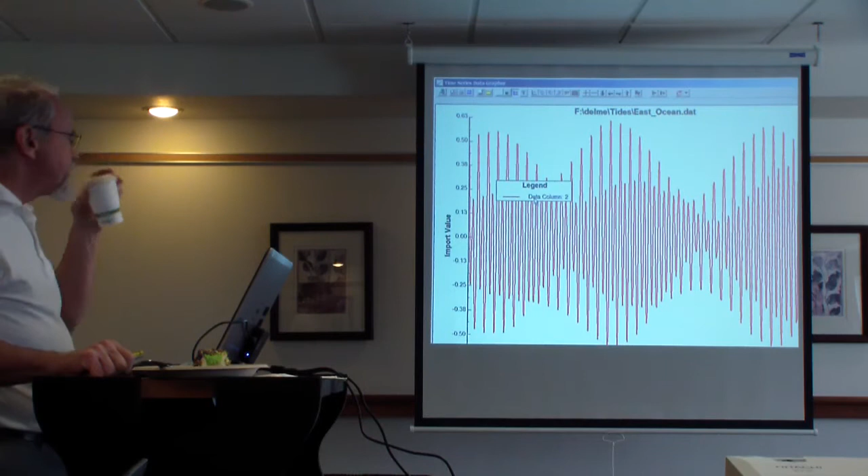These are legacy left over from when I made that first mistake. Did you already download from Dropbox? Yeah. Okay. You can use those. Yeah, that's fine. Here we need to change the column to number 2. Hit enter. Preview. Why is it not showing? Use this one, right? Yeah.

Maybe it works. Okay. I just closed it and opened it and it worked. Okay, so you closed EE and then reloaded. So something was weird there. But glad you got it working. Sorry about that. Yeah, I'll make a note of that. Yeah, it's good. Everyone's trying to do the same thing, and then we'll find out problems. That way, make it a more robust tool.

So, can I get mine back? Sure. Thanks. So what else did you add after? We created another two pressure boundaries. Yeah, pressure. Go to the boundary conditions and add 2. Go in. All right. Let's move on to the second one. Time series. Everybody there? Okay. So say okay. It brings it in. There it is. You can again look at it if you want, just to make sure it brought it in properly. Use import data.

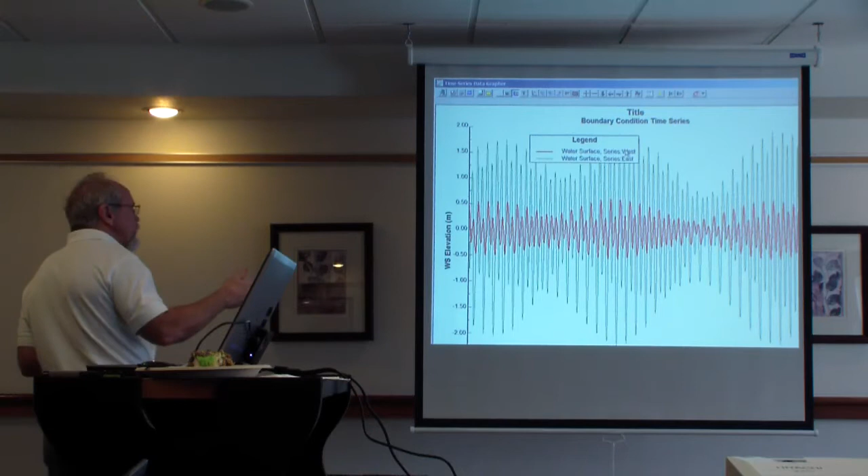So everybody should have something that looks like this. We have 2 water surface defined series, one for the east, one for the west. The east has the larger amplitude swing, and the west series has a lower amplitude swing.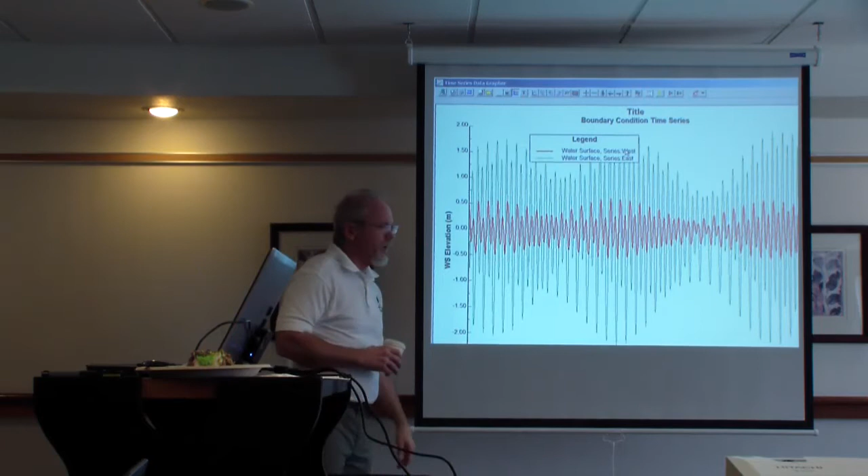OK, now all we've done is define the series. We've not linked anything, so you'll notice everything is still set to none here. I'm going to go to the first cell, which happens to be in my polygon. I drew it from west to east.

So my number one first in the boundary group will be my west boundary series. Then I go to the end and apply the east boundary series. Now as I scroll through the rest of them, you can see they're all set to none. You'll also see up here that there's 2 boundary series defined.

Now, it doesn't matter what this is, but what I want to do is, if everything was consistent, I'd go up here and hit set all, and it would apply that same series to everything. But that's not what we want to do.

We're going to use this interpolation option here. In this case, if you press set all, it'll overwrite that last one we just set for the east boundary condition, and everything would have been set to the west. It just overwrites every current setting, with whatever is currently displayed here, and applies it to everything when you hit the set all button.

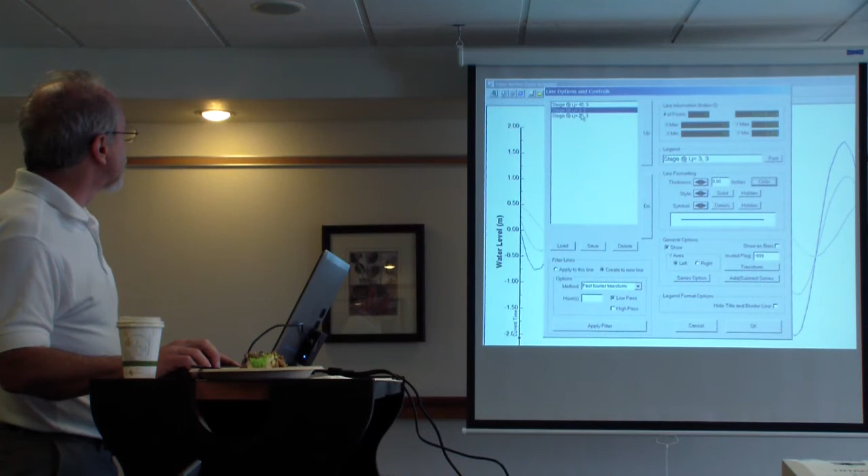So now let me change some colors and formatting so it's a little easier to see. That one is the east - make that... whoop, wrong button. That red. And this one blue, and we'll do the mid-depth green. So there's the interpolated series.

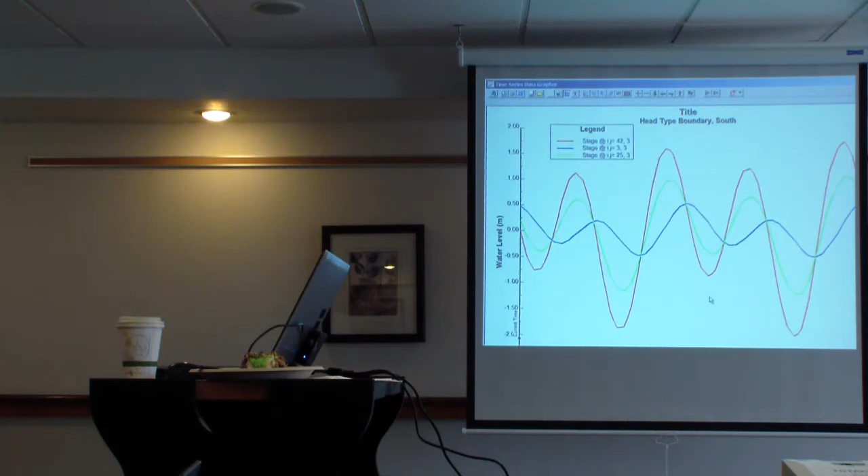It's really easy to do these series. You just need to have something that you can define your bounding series on.

I'll save this out. I exported the data, and I'm also going to save the format. The default is DSG, so if later I want to bring up a plot that looks just like this or real similar, I can just load up that DSG, and all my labeling, colors, and everything will all be set.

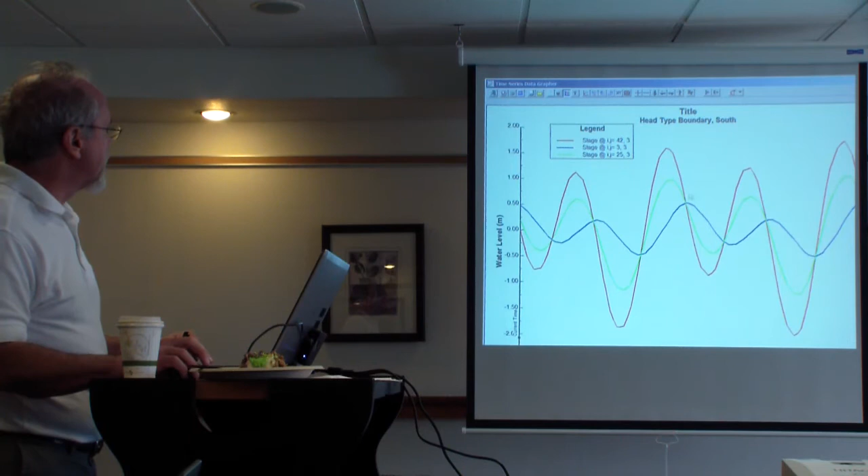Now, that pretty much sets it up for us, but this is going to be interesting because we have a varying initial condition. So click on the cell and notice the head. Initially what it's saying is that it's going to start off, that cell, the initial water surface elevation at time 180 is 0.48 meters of head above datum.

Far end, minus 0.009. And then mid depth, 0.29. So there is a water surface slope in this example, sloping there to the east.

So if we want the model to - I mean, it probably would start up, it's not going to be dramatically off. But let's go ahead and build a water surface elevation initial condition that somewhat mimics the tidal initial condition. So we know here that it's 0.48.

So I'm going to create 2 points - one that represents the west elevation and one that represents the east elevation. And I do this for simple models.

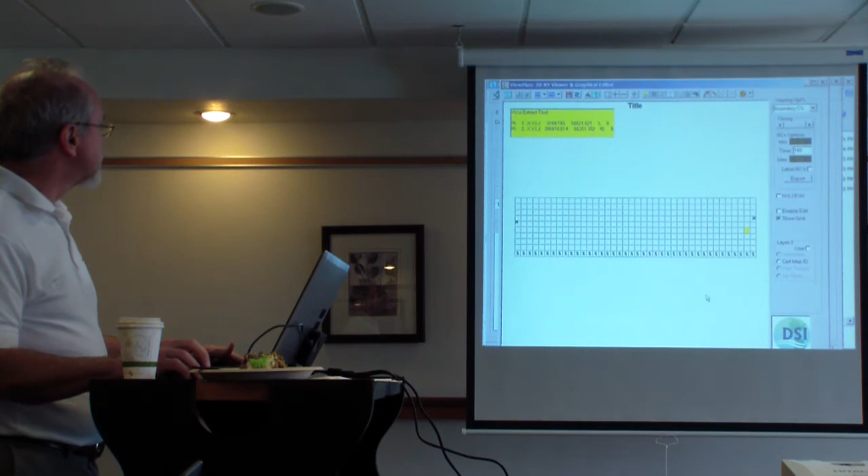Now I'm going to go ahead and select that. But right now, actually, what's in that file is not water surface elevation. It's kind of nonsensical for what we need. So just remember, 0.48, and... you guys remember, so you can tell me, because I won't remember. 0.009.

So come in here to Domain, Assign Water Surface Elevations, use point measured data, and browse to that file. But however you guys want to do this, I'm going to go ahead and edit it here.

And change these parameters. This was 0.48 and -9. Oh, too many zeros. Okay.

So I've just assigned an initial condition. Just change this to Elevation IC. And you can see the asterisks - they're just, you can have as many in these kinds of DAT files. They just indicate a comment. They can be interspersed in the middle of the data - it makes no difference. If EE finds an asterisk in the data set, it just assumes it's a comment.

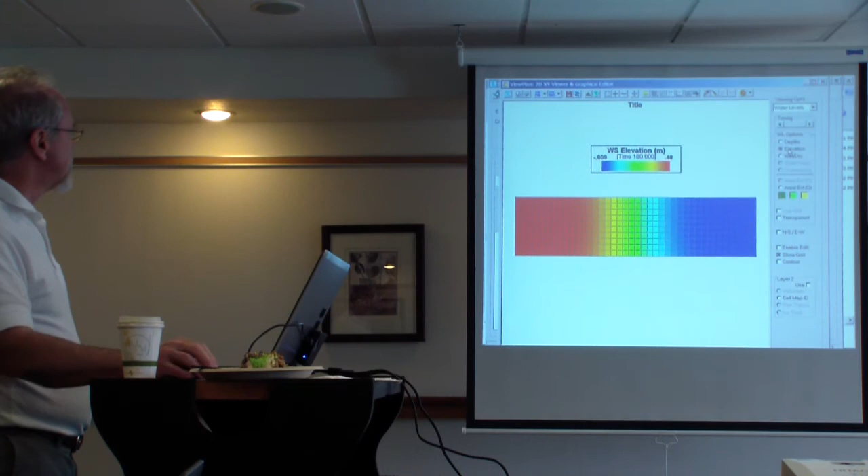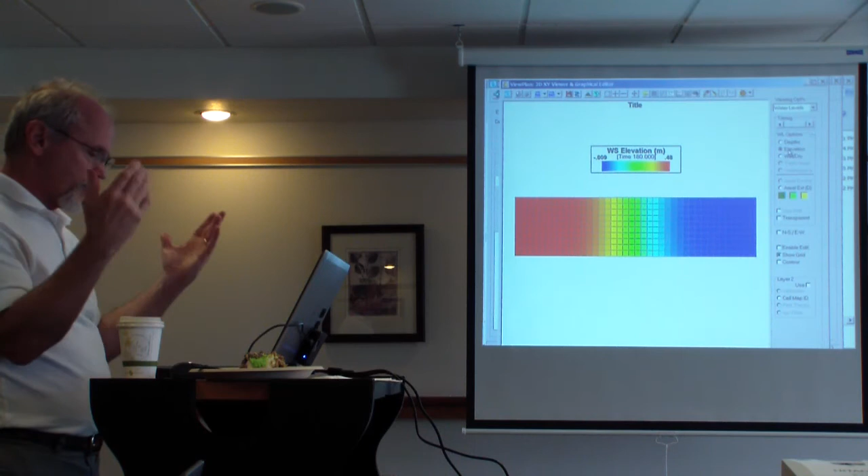So it's sloping from 0.48 to minus 0.009. Okay, we're basically ready to go. I'm going to run. Save it. We have the timing set. We've got initial conditions set. We have boundary conditions set.

Save. I did say this already. Run it. Linkage frequency, 30 minutes, 15 minutes, something - you kind of need to tie this to what you intend to post-process to, and the length of the period of your simulation. Because obviously, if you output frequently and you run a long-term model, the files can get big. So it's kind of a balance. And as far as this goes, change that.

That looks fine. Go. Can you show the water surface elevation again? Yeah, the file. Let's get this up. I think the only thing it changed is the last two values. Yeah, I didn't see the values. It's 0.48 and minus 0.009.

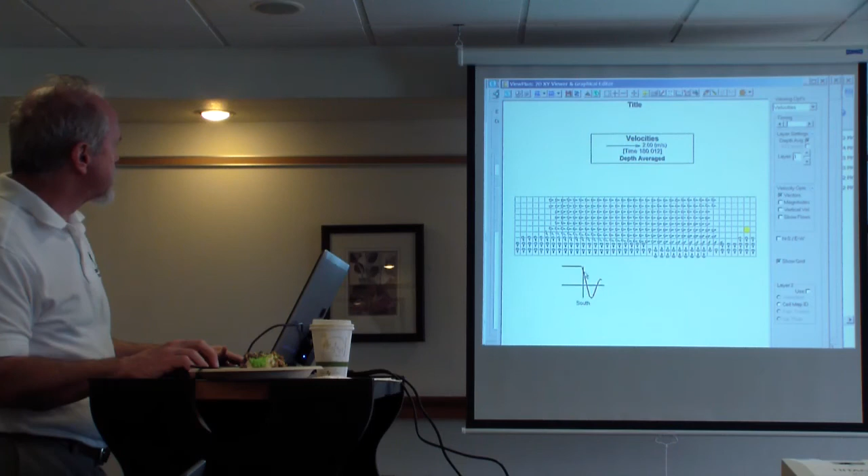So this is what's happening at the boundary conditions so we can see the direction. Let's turn on the animation and just kind of watch it, what's happening as the tide - you can see it, kind of a wave as the tide propagates down the boundary. Anyways, obviously we can keep adding complexities, but I'd rather do that with a more realistic model, the Chaku. So with that, any questions on interpolations? Did everybody get it working?

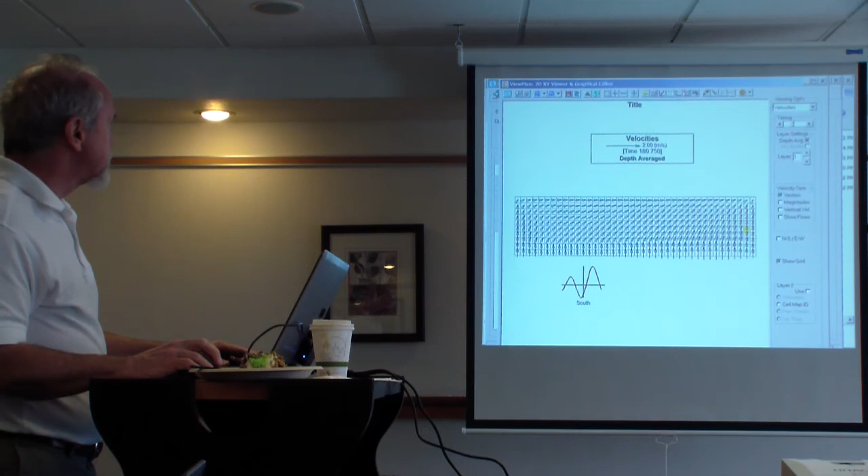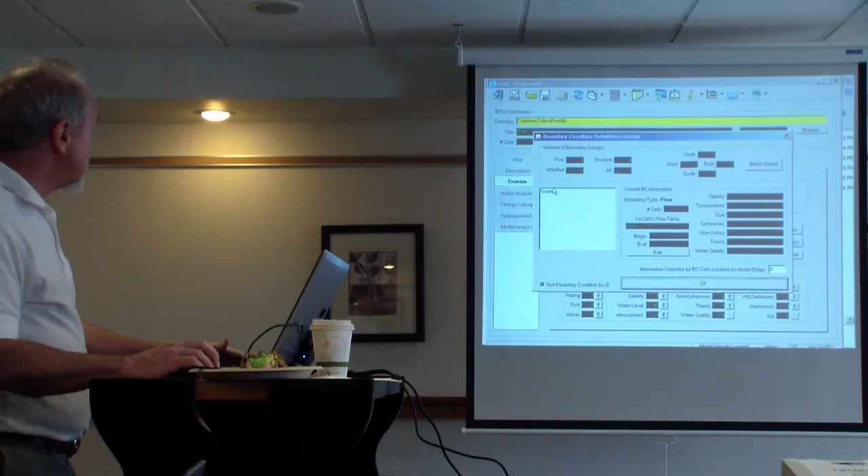Oh, one last thing I want to talk about interpolation, which I think is important to note. Go to Domain tab, Boundary Conditions, Edit/View. There's our south boundary, how many cells, etc. I'm going to double click on that. As we scroll through, again, we talked about this column.

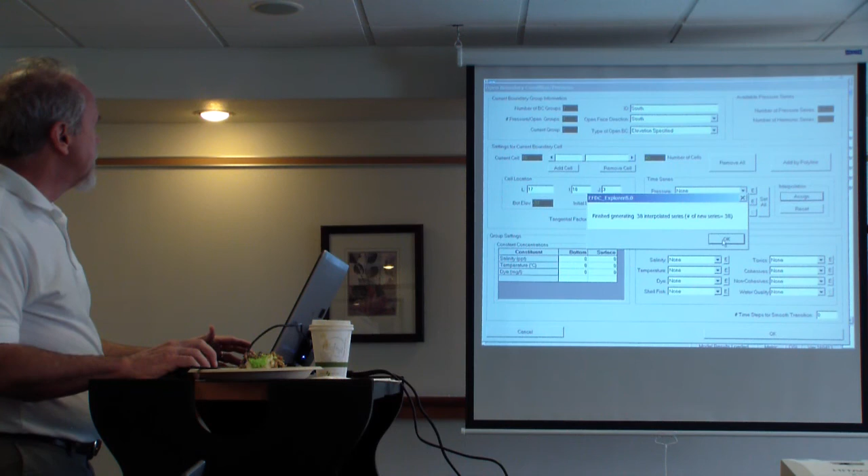Well, let's say I change something - I change either the east or the west boundary, and I want to reapply it. First, I just hit reset over here, and what that'll do is it deletes the association of that cell with the interpolated series, and it deletes the interpolated series. So right now there's 40 series currently defined. I hit reset, yes - it removed 38 series from the series file, as well as decoupled them from the individual cells. So now they're unassociated again. And then I make a change, do whatever, then I hit assign again, and it's done. Just that quick.